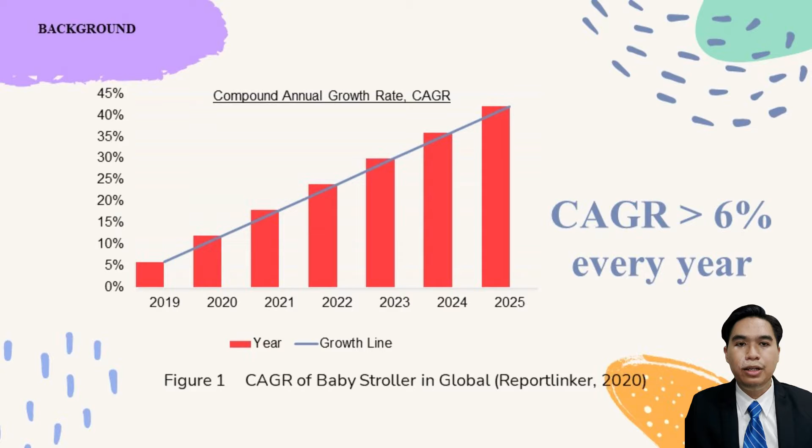Introduction. According to Reportlinker 2020, the compound annual growth rate for baby strollers globally is expected to increase by 6% every year from 2019 to 2025, as shown in Figure 1. Next, the MR 2021 report listed that Europe is leading the global baby stroller market in 2022, followed by North America, East Asia, South Asia, Oceania, Latin America, and the Middle East and Africa.

Next, we move on to the problem statement. There are two main concerns that all parents must know about if they have a newborn in their family: lack of ventilation and overheating.

Waller 2021 mentioned that covering a baby stroller can increase the risk of heat stroke and possible sudden infant death syndrome, SIDS. It is proven by their experiment that the baby stroller without cover is 22 degrees Celsius, while the covered baby stroller ranges between 34 to 37 degrees Celsius. The reason is that the lack of ventilation inside the stroller can accumulate heat over an extended period.

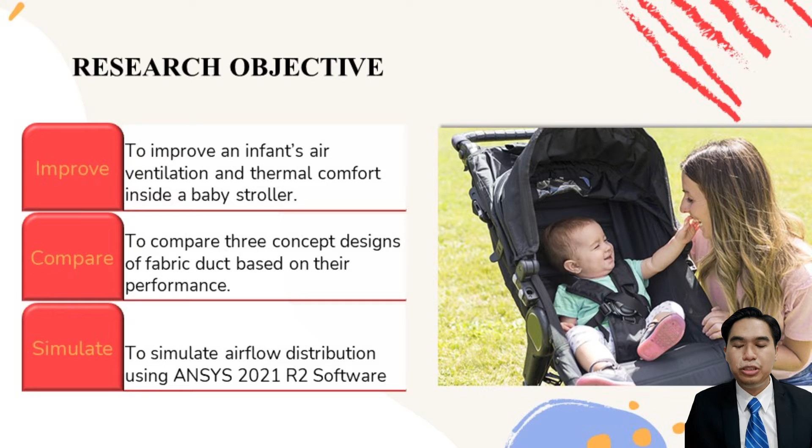Objective. The first objective of this research is to improve an infant's air ventilation and thermal comfort inside a baby stroller, followed by comparing 3 concept designs of fabric ducts based on their performance, and finally to simulate airflow distribution using ANSYS 2021 R2 software.

The scope of this study will focus on a non-moving, outside-facing stroller for the experiment. Temperature, velocity, and airflow pattern are the parameters for the experiment and simulation. The experiment will be conducted at Ayer Keroh, Melaka, Malaysia, and finally ANSYS 2021 R2 software is used to simulate a stationary baby stroller seat.

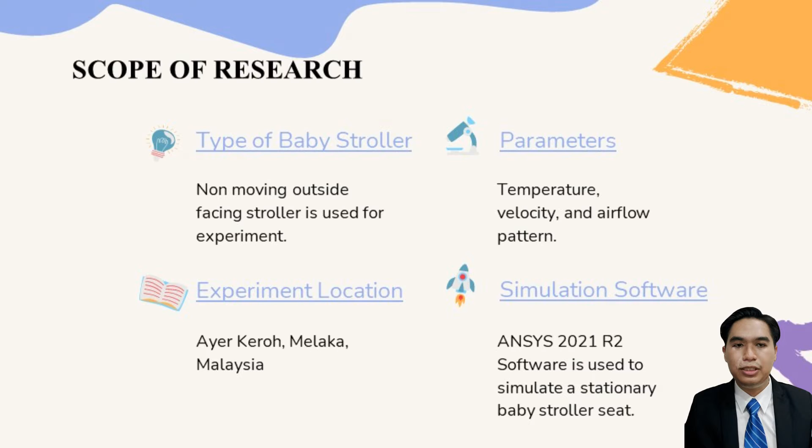Now we move on to the literature review. Becker 2018 defined a baby stroller as a type of kid transportation equipment with a handlebar that allows parents or users to push it and carry the baby to a location. Parents can carry their infants around more comfortably, accessibly, and safer. Furthermore, baby strollers are essential for managing life with a newborn and lighten the burden of carrying a newborn or young child on short or long trips, according to Koh 2019.

Birken 2015 had listed the reasons parents use the baby stroller, which are transportation, storage, leisure, supervision, parent physical activity, and sleep.

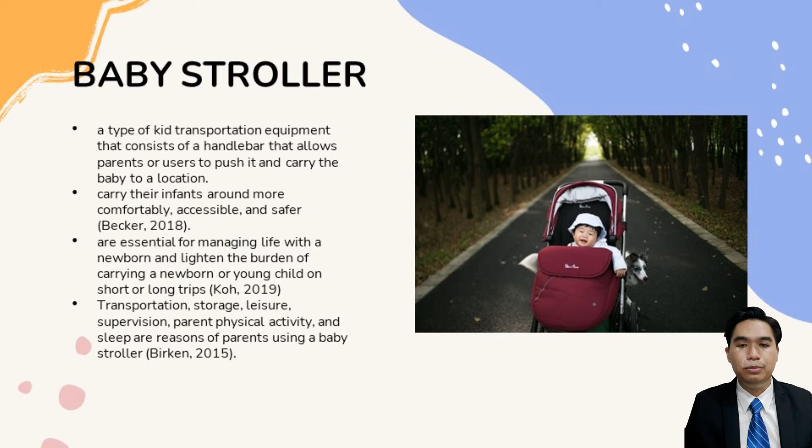Next, thermal comfort. Thermal comfort is a subjective state of mind that expresses contentment with the thermal environment, according to the American Society of Heating, Refrigerating, and Air Conditioning Engineers et al. 2017. It can also be defined as a person's mental condition regarding whether they are too hot or too cold, says Health and Safety Executive 2022.

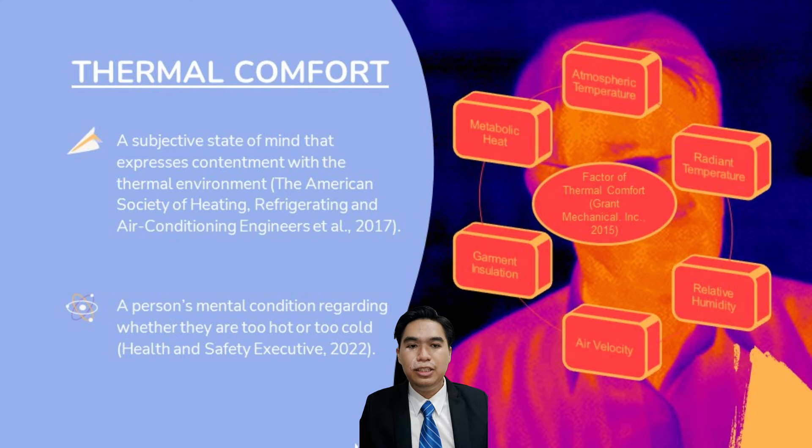Next, Grant Mechanical Incorporated 2015 listed 6 factors of thermal comfort for a person: atmospheric temperature, radiant temperature, relative humidity, air velocity, garment insulation, and metabolic heat.

According to Wright 2022, the newborn's average temperature is 37 to 37.9 degrees Celsius. Babies have the highest average temperature compared to other stages like children, adults, and old age. The forehead, rectal, and ear are the parts of a newborn with the highest temperature. Therefore, parents should keep check of their infant's average temperature by touching those parts to see whether the baby is too cold or too hot for the baby to achieve thermal comfort.

Next, I will briefly explain the fabric duct, centrifugal fan, and simulation. A fabric duct is a ventilation system that consists of air-moving equipment, according to the Canadian Centre for Occupational Health and Safety, 2016. A fabric duct can also be defined as a type of ventilation ducting made of any fabric material like polyester and comes in various shapes, says fabric duct supplier Prihoda 2015.

Mackerness 2013 says the benefits of using fabric duct over steel duct are improved productivity, greater efficiency, solving thermal comfort issues, requiring lesser installation time, and improved interior environment.

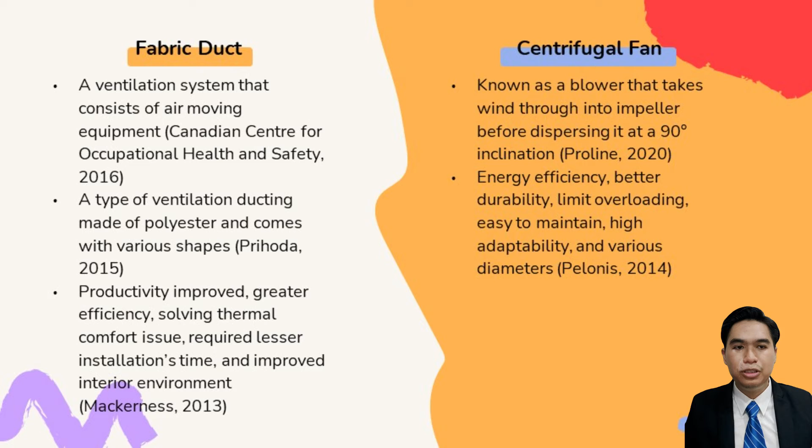Next, centrifugal fan. A centrifugal fan is a blower that takes wind through into the impeller before dispersing it at a 90-degree inclination, according to Proline 2020. Energy efficiency, better durability, limited overloading, ease of maintenance, high adaptability, and various diameters are the benefits of a centrifugal fan, according to Pelonis 2014. Finally, simulation.

Shannon 1975 defined simulation as designing a model to understand the application's behavior for a control system.

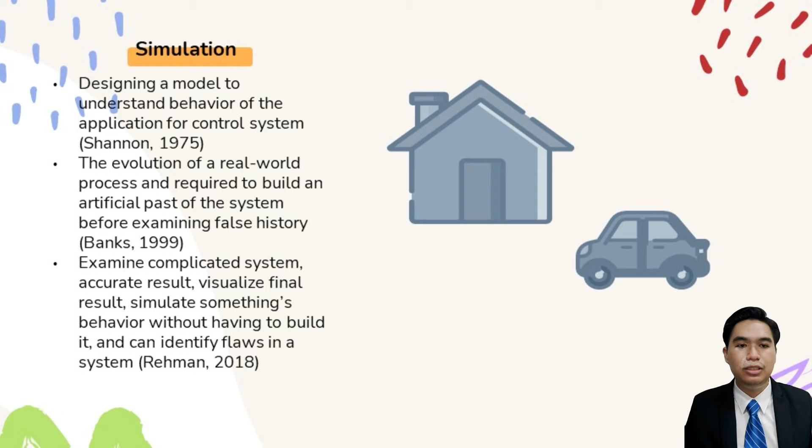In addition, simulation is the evolution of a real-world process and is required to build an artificial past of the system before examining false history, says Banks 1999. Simulation can examine a complicated system, give accurate results, visualize the final result, simulate something's behavior without having to build it, and identify flaws in a system, according to Rehman 2018. This is the research gap for this study.

The purpose of the research gap is to compare the proposed study with the previous study to find the area that the previous researcher did not accomplish during that time. It consists of 6 research papers and 5 patents in this research gap.

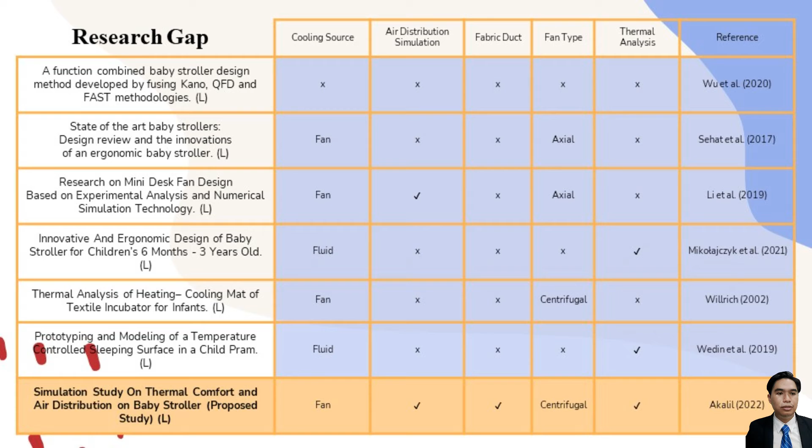The following slide compares the previous patent and the proposed study. This table shows that most inventors do not include their simulation result, application of fabric duct in their product, a fan for creating ventilation, and thermal analysis to see whether thermal comfort is good or bad.

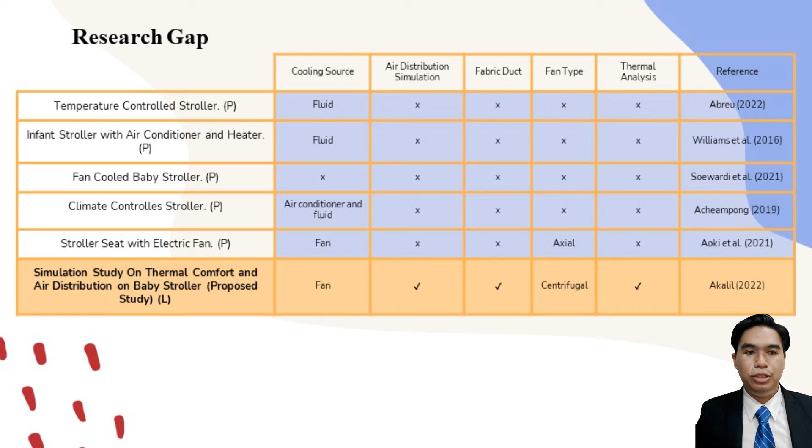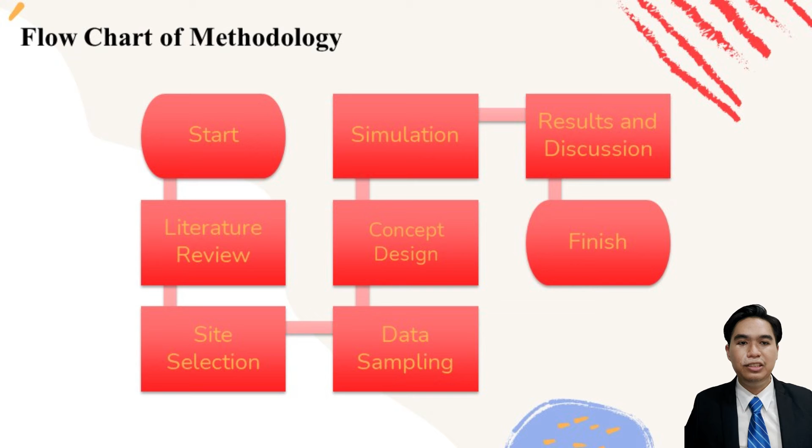Now we move on to the methodology. Flowchart of methodology, as you can see on the screen. This is the flowchart of the methodology used in this study. It starts with literature review, site selection, data sampling, concept design, simulation, and analysis of results.

Experiment procedure consists of 4 steps. These are the steps used for our experiment to collect the data required for the simulation process. Step 1 is to set up the tools, like an anemometer, thermometer, and others at the desired place. Next, run the experiment to measure temperature and velocity readings.

Step 3, generate the graph using the proper software. For temperature reading, we use SE309 software with data logger features, which can automatically create the graph inside the laptop. For velocity reading, we use Microsoft Excel to create the comparison graph. The final step is documentation: present the data using a table matrix to identify its condition and achievement in Chapter 4 of thesis writing.

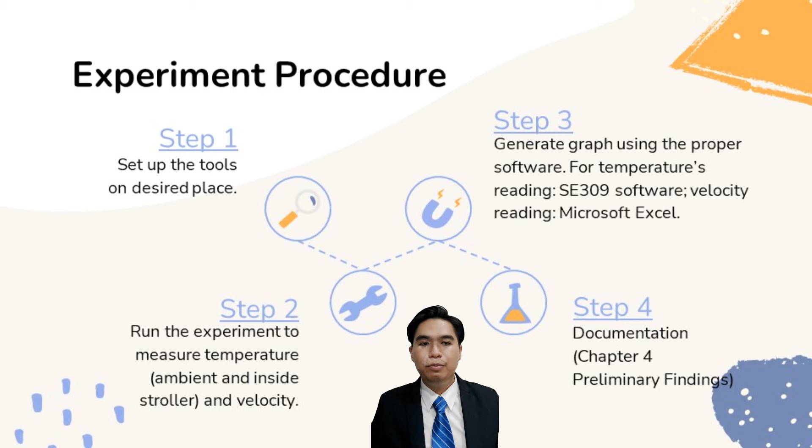There are 5 tools used for this experiment, which are an anemometer for measuring velocity, a thermometer to measure ambient and baby stroller temperature, a baby stroller, a stopwatch to measure the time taken, and duct tape to secure tools in place.

Next, these are the tools set up on the baby stroller. As you can see in this slide, the anemometer and thermocouple are placed inside the stroller, while another thermocouple is placed outside the baby stroller. For the thermometer, we place it at the stroller's storage on the back of the canopy so that the thermocouple could reach inside and outside.

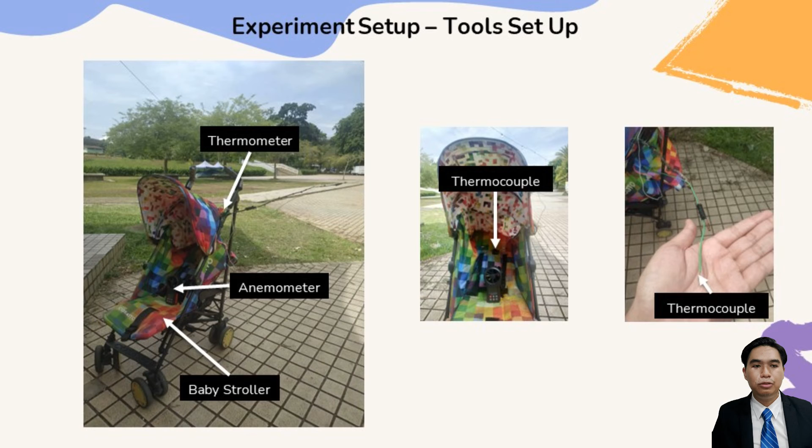Each of the readings consists of 3 tests: Test 1, Test 2, and Test 3. Ambient and baby stroller temperature determines the thermal comfort of the baby stroller, whether it is achieved or not. Meanwhile, velocity reading is for determining the ventilation inside the baby stroller.

Each test runs for 30 minutes starting from 10 a.m. Next, the interval for taking readings is 30 seconds. Finally, the condition of the baby stroller is non-moving and on a sunny day.

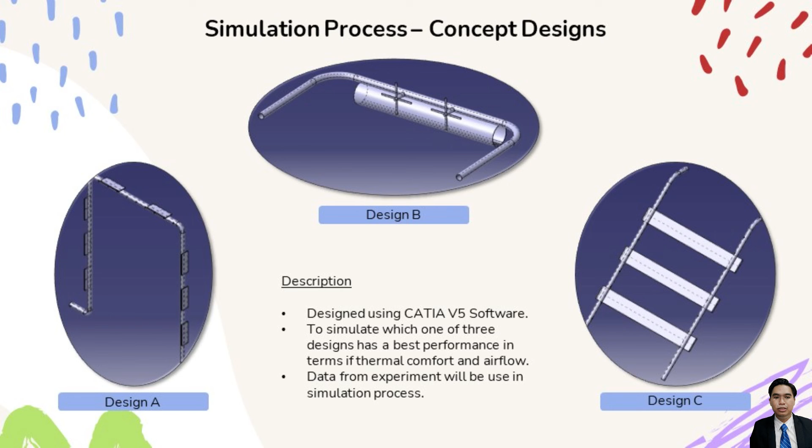After the experiment is done, all the data will be used for running a simulation. Therefore, as shown in this slide, 3 concept designs were created for that purpose: Design A, Design B, and Design C. These concept designs were drawn using CATIA V5 software, and this process aims to determine which of the 3 designs has the best performance in terms of thermal comfort and airflow criteria.

Now we move on to the last part, which is preliminary findings. This slide shows the results of ambient and baby stroller temperature readings. The average infant's temperature was set to 37.5 degrees Celsius to determine the test's thermal comfort. If the average baby stroller temperature exceeds the average infant's temperature, then the test was considered not achieving thermal comfort.

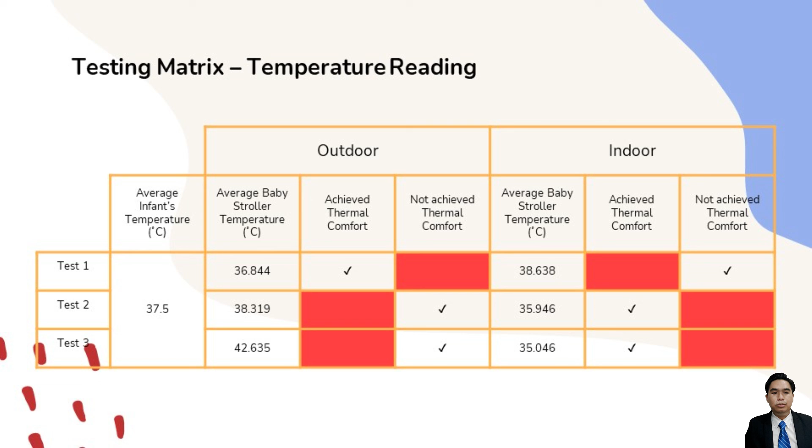For this table, only test 1 achieves thermal comfort for outdoor conditions, and test 2 and test 3 achieve thermal comfort for indoor conditions. If the stroller is exposed to sunlight for extended periods, the average baby stroller temperature will gradually increase. Meanwhile, if the stroller is in an indoor environment, for example under a roof or shade, it will decrease the average baby stroller temperature. This shows the baby stroller can cool down in an indoor environment.

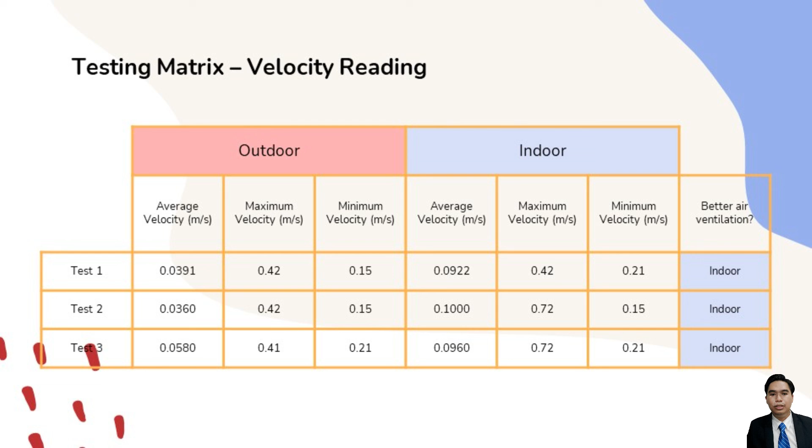Next, this slide shows the results of velocity readings. The average velocity in the indoor environment for test 1, test 2, and test 3 is higher than the average velocity for outdoor. This difference is because of the location factor. For indoors, there are some air blockers like pillars, walls, and many more. As the wind flows indoors, the air will be trapped and has nowhere to go, accumulating inside the indoor environment. Therefore, air circulation creates ventilation, which can cool down or protect from sunlight heat. In conclusion, indoor situations have better air ventilation than outdoor ones.